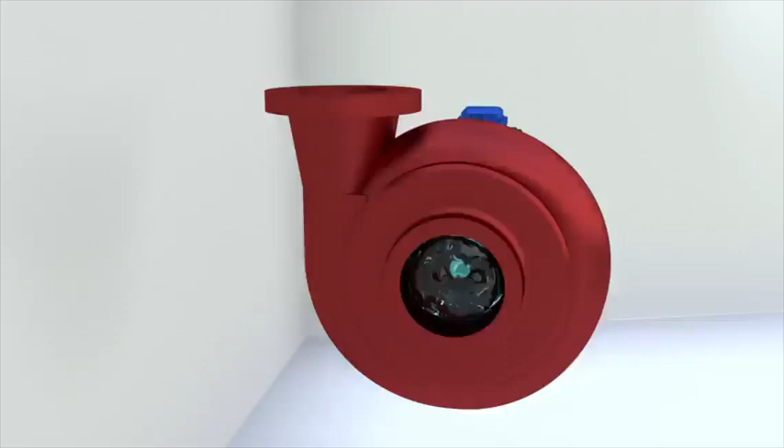How does a centrifugal pump work? Centrifugal pumps are used to pump water, oil, and other liquids. Let's try to understand why these pumps are designed to carry out the task of transporting liquids successfully.

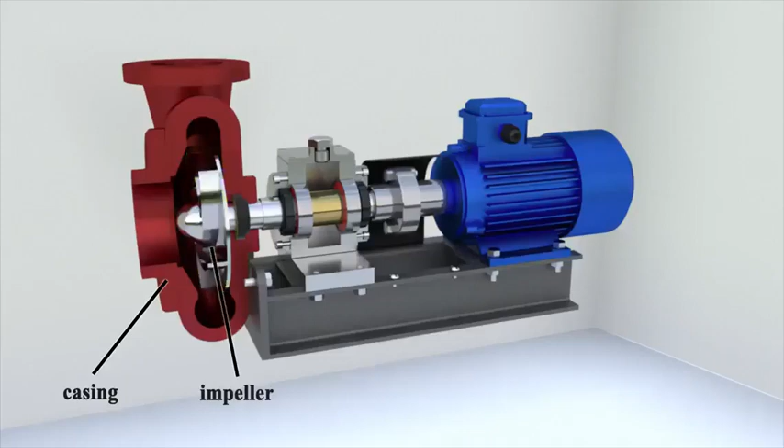The main elements of a centrifugal pump are the casing and the impeller, which drives the liquid. The impeller is mounted on a shaft, and the shaft can rotate on bearings. The power is transmitted from the motor, most often an electric motor, to the shaft.

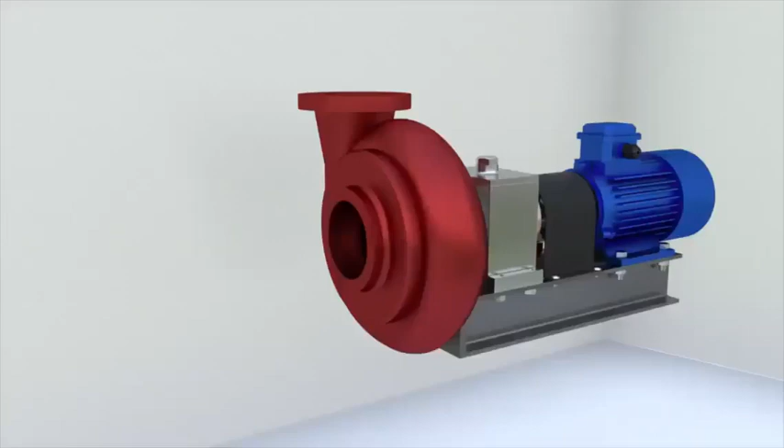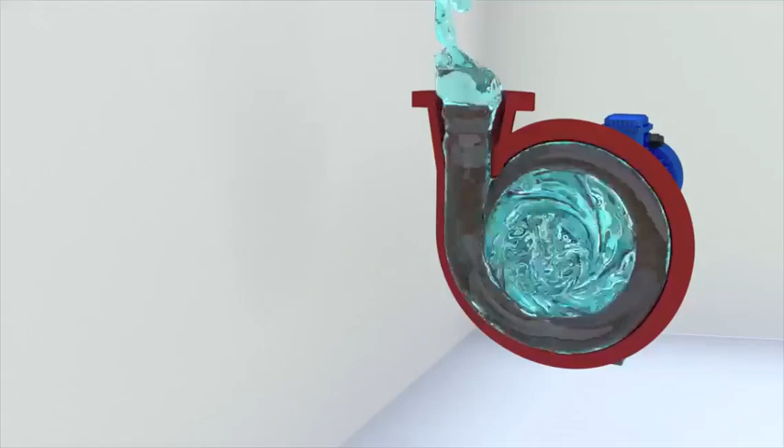The impeller of the pump rotates together with the shaft. The vanes in the impeller act on the liquid and make it rotate. The liquid particles are accelerated, and as a result of the impact of the vanes, the energy of the liquid flow is increased.

The accelerated liquid particles enter the volute, which converts part of the velocity into pressure. The diameter of the passage section of the volute in the discharge nozzle gradually increases. The fluid velocity decreases, and the pressure, according to Bernoulli's law, increases.

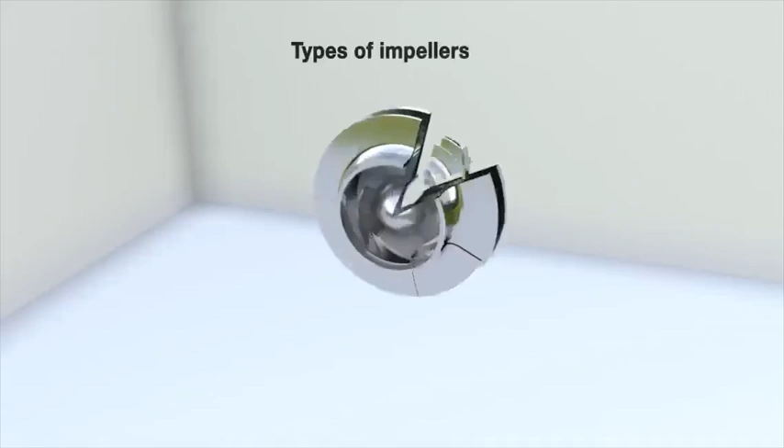Three main types of impellers are used in centrifugal pumps: closed, with back and front discs, vanes and fairings; semi-open, with the vanes free on the front side; and open, with the vanes free on both sides.

If bearings support only one side of the shaft, the pump is called a cantilever pump. It is a versatile design that is used in small and medium-sized pumps. A heavy impeller cannot be cantilevered.

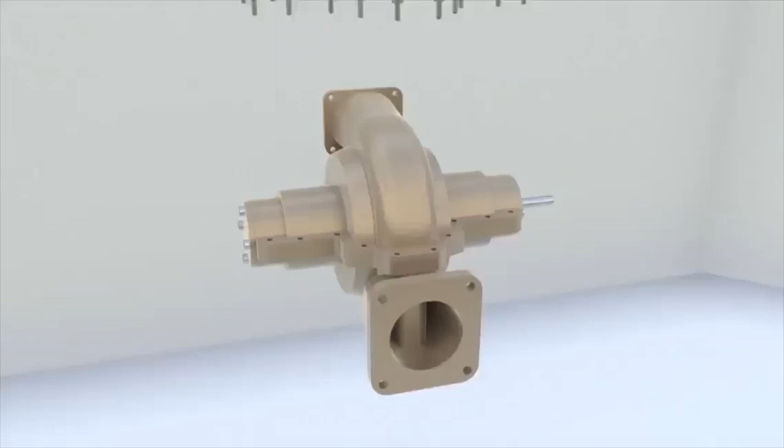In this case, the shaft is mounted on bearings and the impeller is placed between them. This construction scheme is well suited for double suction impellers, where the vanes are placed on both sides. A double suction impeller allows liquid to enter the impeller blades from both sides. Thus, we have two pumping units without significantly increasing the weight and dimensions of the pump.

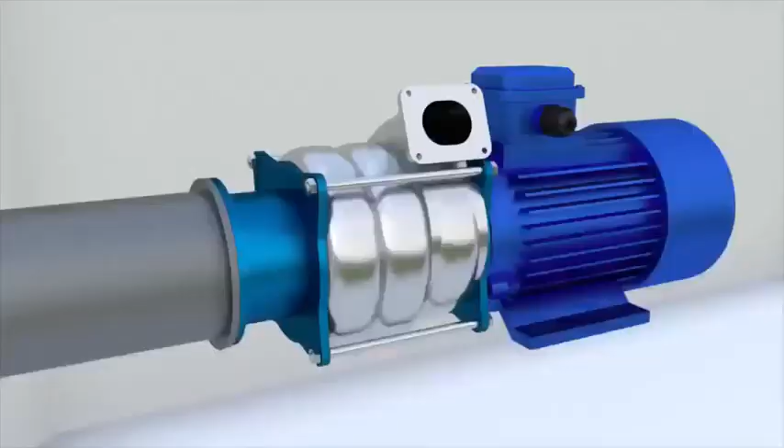This scheme is relevant for pumps with high capacities because the pumping units are installed in parallel. Multi-stage centrifugal pumps: by installing pumps in series, the head of the liquid can be increased in the system. Pumps installed in series can be combined by placing several impellers in the same casing. The liquid will go from the first impeller to the second one, from the second impeller to the third one, and so on. Using a multi-stage arrangement can increase the head of the pump many times over, as the impellers are mounted in series, and each of them increases the head.

In multi-stage pumps, different impellers can be used. For example, a screw centrifugal pump has an auger on the first stage and a centrifugal impeller on the second stage. When the pump is running, the liquid flows continuously into the pump casing through the suction nozzle.

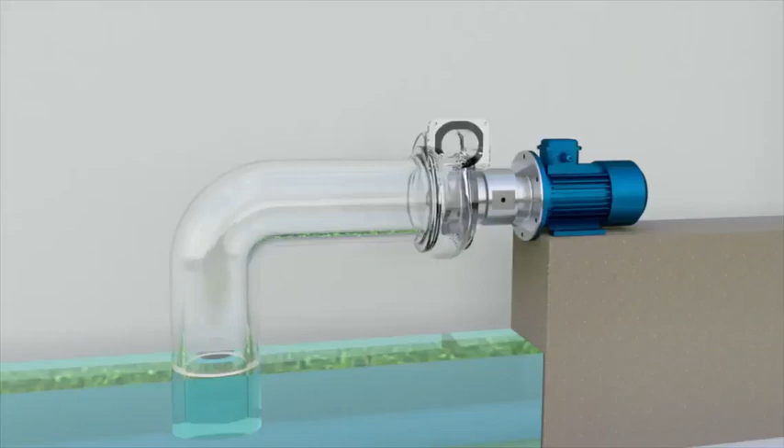But what happens if there is no liquid in the pump? For example, when the pump is first switched on, the pump casing will be empty. For the liquid to fill the pump, the pressure in the pump casing has to be lower than the atmospheric pressure. Then the atmospheric pressure will cause the liquid to fill the casing.

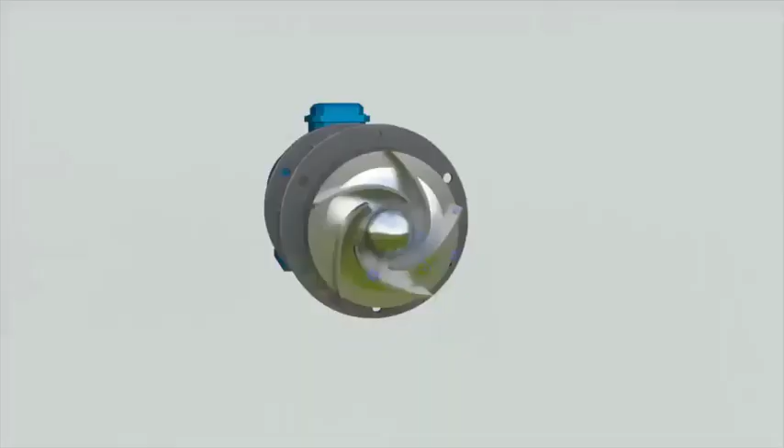To reduce the pressure in the pump, some of the air has to be pumped out of the casing. Is an ordinary centrifugal pump able to do this? The answer is no, because the particles move in the pump due to inertia, which depends on mass. The mass of air particles is much lower than that of water particles, so it is impossible to pump air at speeds that a centrifugal pump operates at.

For this reason, centrifugal pumps must be primed before switching on, either through a special channel in the casing or through the discharge nozzle.